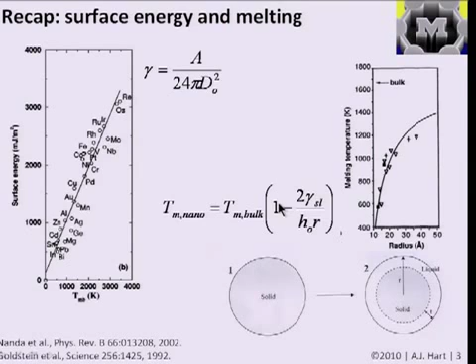And what I want to talk about today is how we can now build upon our understanding of wetting, or of surface energy, to understand a bit about how surface texture and surface energy relates to the wetting behavior, basically if liquids wet surfaces or they do not. And then we're going to talk about effects of micro nanoscale textures on fluid flows.

The idea here is that I think there are some analogies to what we previously defined as classical and quantum size effects, about how we need to think about fluid flows when the dimension of our system gets small. We're going to talk about what is considered the breakdown of the no-slip condition at solid surfaces when you have a small-scale system. Remember, if you took fluid mechanics in the past, when you derived the flow over a surface or the flow through a pipe, we always applied the no-slip boundary condition, i.e. we assume that the molecules at the wall have a 0 velocity.

That's not actually true, but when we model the flow through a macroscopic pipe, there is actually a bit of slip. But because interactions within the fluid, like molecules colliding with molecules within the fluid, are so much more important than interactions between the molecules and the wall, it doesn't matter whether we say there's slip or not. If we say there's no slip at that scale, it's a lot easier to solve the problem.

But it turns out, much analogous to thinking about boundary scattering of heat carriers and scattering of electrons going through materials, when we get down to small scales, these interactions with the wall become important, and it makes a big difference whether or not we consider whether the flow is slipping past the wall.

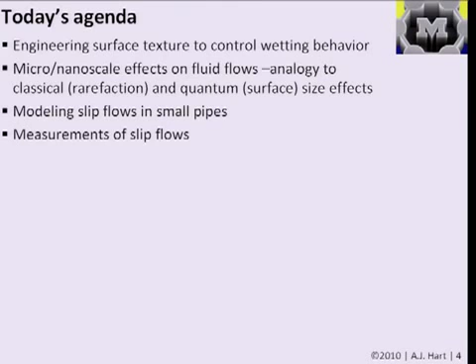In fact, some materials, for example carbon nanotubes, exhibit a lot more slip than other materials, and that leads to some interesting observations about their properties and understanding of slip. Although it's pretty difficult, we'll talk about research that has led to experimental understandings of slip flows of gases and liquids through microchannels and nanotubes, and that'll be our last topic.

So there are a bunch of papers to read. I pulled the Tuteja reading up from last time, so it's now in this lectures folder. Then I have two papers and one excerpt from a book talking about small-scale gas and liquid flows. Karniadakis, the excerpt I took from this book called Microflows, is a nice book on small-scale flows in general. The excerpt talks about the reasons why we need to consider different flow behavior in small-scale geometries.

And then the Arkilic paper talks about the way we model slip flows through microchannels, and discusses experiments used to measure things like the coefficient of slip, basically how much a gas molecule will slip against a wall inside a channel. Then the Eijkel paper talks a bit about liquid slip, and we'll understand the different ways we think about gaseous slip and liquid slip a bit later.

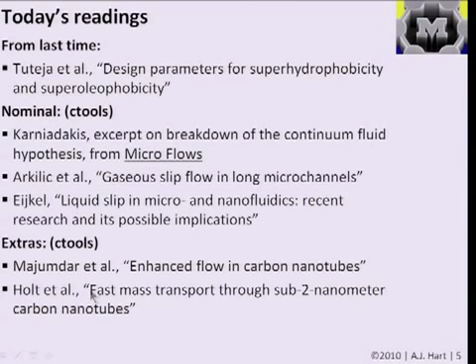There are a couple of extra readings that talk about slip flows and measurements and modeling of flows through carbon nanotubes. I think it's a really interesting topic, and we'll cover a bit about this in lecture. In the homework set, I ask you to reference this paper to obtain a number you'll use in your calculation. This is the paper I mean in the description to the problem, I think it's problem 1 in problem set 2.

Okay, so first I'm going to talk a bit about wetting, and you've probably seen wetting before in fluid mechanics or other classes. The new concept I want to introduce is that the ability to engineer surfaces chemically and physically is leading to understanding of how natural surfaces behave and how to design surfaces so they, for example, will attract liquids or repel liquids.

When I say attract, I mean having a surface that wets a liquid, or a surface that is wetted by a liquid like so, which is quantitatively referred to as having a small contact angle, because classically the contact angle theta is measured through the fluid from the substrate up to the edge of the meniscus here, or to engineer surfaces so the liquids don't like them, or they don't like the liquids.

And that is the case where you have a large contact angle, and there's a large angle if you measure through the fluid like so.

So wetting, in terms of a formal definition, is the ability of a liquid to maintain contact with a solid surface. And as you can imagine, what governs wetting behavior? Well, it's got to be the interactions between the molecules in the liquid and the molecules in the solid.

Imagine if you have a drop of liquid, which you can consider like a particle or a spherical body. There are cohesive interactions within the liquid, and then there are adhesive interactions between the liquid and the other material. So in the case of a liquid and solid, the contact angle between the liquid and the solid is going to be determined by this overall free energy balance, depending on what creates a net decrease in energy of the system.

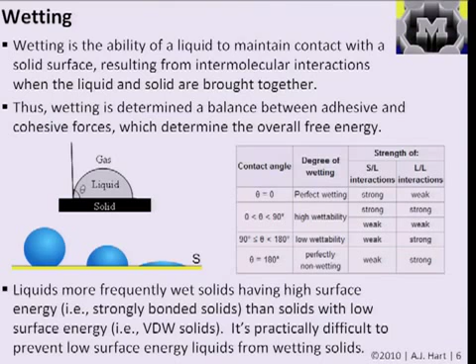If there's not a lot of attraction between the liquid and the solid, it's more likely to roll off. In terms of what governs surface energy, solids that are strongly bonded have high surface energies, and you'd expect them to have large van der Waals forces with other solids. Solids that are weakly bonded probably have lower surface energies and lesser van der Waals interactions, and that relates to wetting behavior in general.

One of the real practical challenges has been that it's hard to design surfaces that are non-wetting to liquids with low surface energy, because such liquids will be much happier to spread out and cover a surface, possibly decreasing the overall free energy of the system. This has practical implications for things like cleaning up oil spills, since oils and solvents have low surface energy, and it's also important for separation of liquids with different surface energies.

So I just wanted to show you a couple of videos. One of the things that's done when people study interfaces between solids and liquids is measuring the contact angle, and you sometimes use what's called a contact angle goniometer, which has your surface, a good light source, and a good camera that lets you get a picture of the situation.

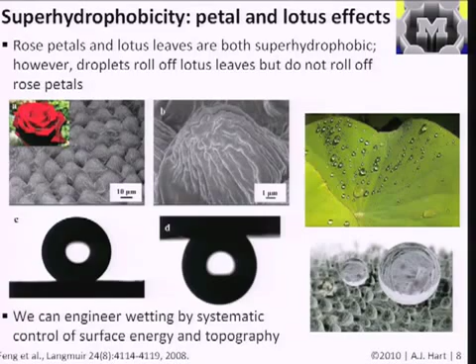When people look at the geometric dependence of how wetting depends on geometry, they typically define two different states when you have a textured surface. First, the simplest case is if you have a flat surface between a solid and a liquid and then a surrounding medium, which we'll for now say is a gas, and you define the contact angle like so. However, if you have a textured surface, and this can be something regularly textured, like something etched with micropillars, or something less regularly textured, like the natural surfaces we just saw, you have to consider the properties of this composite interface.

Basically how the liquid interacts with all the surface structures that you have. There are two states, and the state where the liquid is penetrating down to the subsurface, basically wetting all of the surface area available, is what's called the Wenzel state.

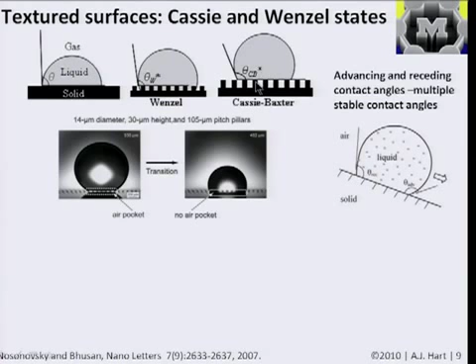And when the liquid is sitting up above the texture, it's what's called the Cassie or Cassie-Baxter state. You can go in and look up ways to derive the contact angles in both of these cases depending on the roughness and surface energy. But basically what happens is if you manipulate this texture in response to the surface energies of the materials the surfaces are made of, you can control the contact angle between the two.

There are ways also, for example, to observe the migration and wetting of surfaces at relatively small scales. This is a picture of a study of the wetting behavior of a surface inside an environmental SEM, where they're condensing water droplets on the surface while watching it happen. So this is happening at low pressure, and you're just letting a little bit of water vapor into the chamber, and the droplets are condensing.

For example, you can see here how some droplets nucleate on the bottom surface and are really too small to cover a number of pillars, and other droplets may nucleate on the top surface and then grow into larger droplets and perhaps will eventually end up covering the whole and being non-wetting on the top. We really haven't talked yet about why changing this texture makes such a difference to the liquid. That's going to depend on the particular conditions of the system.

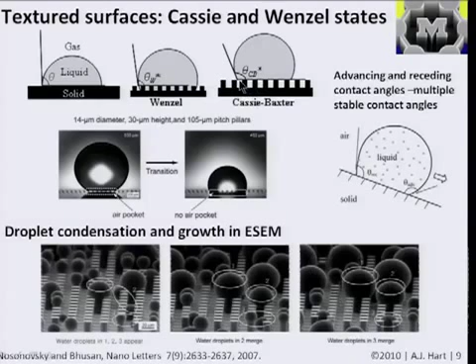What's been found in the case of the two flowers we saw before is that what governs whether or not a droplet rolls off the rose petal or stays on it, versus rolls off the lotus leaf, is how the surface of the liquid actually conforms or doesn't conform to the structures themselves. The texture of the surface in the case of the rose petal gives an overall non-wetting shape to the droplet, but at the interface, the droplet wets the surface very closely.

In the case of the lotus leaf, it's also a non-wetting behavior for the droplet, but the liquid stays above the pillars, giving low adhesion of the liquid to the surface, so the droplet runs off more easily. Whereas here, on the rose petal, you could say it's more stuck, and depending on the size of the droplet, if it's small enough, it can resist the force of gravity as you tip the leaf over.

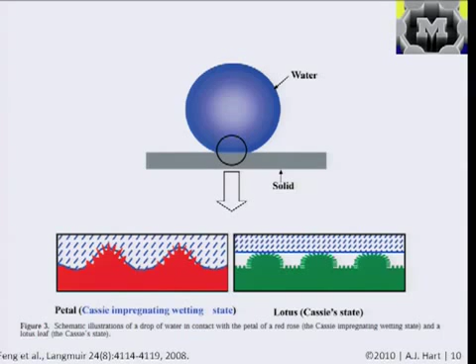There are ways to control the texture of surfaces and their coating. This is an example where a vertical film of carbon nanotubes was grown and then coated by CVD, a vapor deposition process, with a thin layer of Teflon, which has a very low surface energy. They were able to get an extremely hydrophobic surface, taking advantage of the small overall surface area of the tips. You can imagine you'd need to deform the liquid interface a lot for the liquid to penetrate this forest, which is energetically very expensive. So it's favorable for the liquid to stay up on top, and the low surface energy of the Teflon relative to water promotes the surface repelling the droplet, resulting in a surface that is extremely hydrophobic.

This was interesting because it combined the effect of texture and the effect of the chemistry of the coating, the low surface energy of the molecule itself, and at that time it was one of the most hydrophobic synthetic surfaces observed. Typically people say something is hydrophobic when the contact angle is greater than 90, but in this case it was essentially spherical, almost a perfectly non-wetting surface.

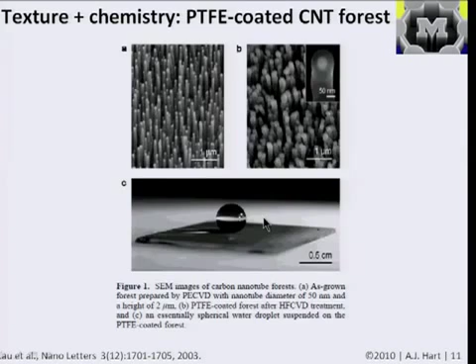More recently, there has been a lot more work in trying to understand how to texture surfaces at the micro-nano scale and quantitatively relate, for example, the shape of the features you create to how the liquid behaves both at the interface and overall.

In the Tuteja paper, it's discussed how these surface textures can be engineered geometrically and chemically to repel oils, liquids with very low surface energies. It turns out what makes a difference is having a texture called a re-entrant texture, something that basically can't be described by a function that would produce a hill shape. It cuts in over itself, meaning it re-enters as you go down.

There is a difference between what we would measure as the contact angle when we look at the droplet on the surface, and the real contact angle between the liquid and the surface. If you looked closely at this surface, you'd find the contact angle between the liquid and each structure is actually quite low, so it's locally wetting the surface. But if you look at the contact angle with reference to the top surface, it's much larger, and therefore you'd call it a non-wetting case.

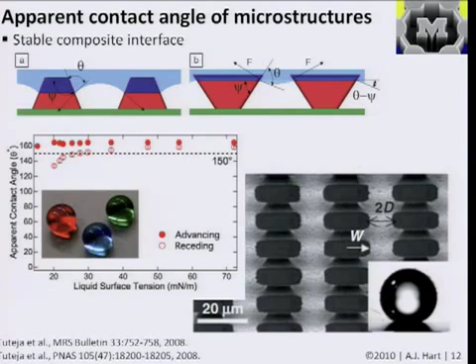Okay, are there any questions about that?

So for the rest of today, I'm going to talk about fluid flows at the small scale, or how we might have to think a bit differently about gas and liquid flows when we have confinement in the geometry. We're going to talk a lot about the basic example of having a pipe, and we're going to go from thinking about pipe flow at a large scale to pipe flow at a very small scale.

As I said before, a real guiding principle for us is that as the length scale of our pipe, meaning the diameter, the direction perpendicular to the flow, decreases, the molecular interactions with the wall become more frequent compared to molecular interactions within the bulk. If I'm a gas molecule going through the fluid, I'm more likely to collide with the wall than with a molecule in the middle as the diameter goes down, so these collisions with the walls become more frequent.

Also, as we remember from fluid mechanics for pipe flow, the amount of friction through the pipe increases, so it takes more pressure. There's more pressure drop from the input and the output of a pipe of fixed length as the diameter decreases, if you want to put the same amount of flow through it. And that is because the importance of the surface grows.

Another thing that's important to consider is that if you have high pressure drops over short lengths, in microscale geometries, and this applies to gas flows, the compressibility is important. Basically, you have to consider the density change as the flow goes through, and we'll see that has a big effect on the prediction we would have for, say, the flow rate through a pipe of a certain geometry.

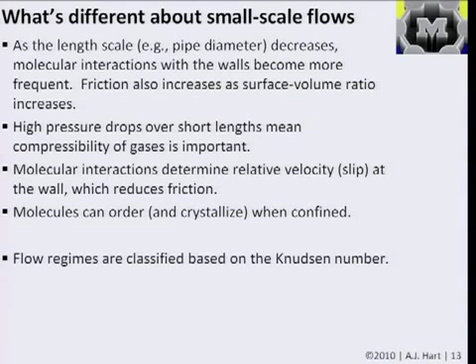We're going to classify flow regimes based on what we'll call the Knudsen number, and that relates to a mean free path for gas, just as we saw a mean free path for electrons or phonons.

So we classify flow regimes based on this dimensionless number called the Knudsen number, and the Knudsen number is equal to lambda, which is the mean free path, divided by L naught, which is our characteristic length scale. So in the case of a pipe of diameter d, our Knudsen number is just lambda divided by the pipe diameter.

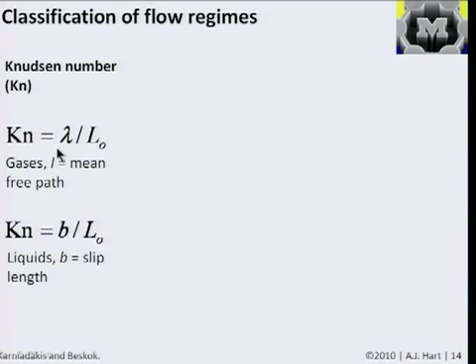In the case of liquids, gases and liquids are different because the density of a gas is way less than the density of a liquid. So for gases, we define the Knudsen number based on the mean free path, but for liquids, we define it based on a slip length which we'll call b. We'll show what the slip length actually means in a few slides. For gases, we can relate the mean free path to the ideal gas law and properties of the gas based on the kinetic theory of gases.

What this means is if you have a higher pressure, then you're compressing the gas and you're going to have a higher number density than normal, and that means the mean free path of the gas is going to be lower. If the mean free path is lower relative to the length scale, then you're less likely to be in a regime where these nanoscale effects are important.

As a calibration, we're going to use the value of a Knudsen number of about 0.01 as a boundary between what we'll call the continuum flow regime, where we can use the classical Navier-Stokes equations to describe the flow, and what we'll call a slip flow regime, where we're able to modify the Navier-Stokes equations for a pipe to account for this slip.

If you go down in scale or down in density, having a more rarefied gas such that the Knudsen number goes up, then you go into regimes where you really need to model the flow at a molecular level and consider the true interactions and attractions between molecules. But in our case, we'll operate mostly in this slip flow regime, and talk about how we can capture this phenomenon of slip quantitatively, then use that to understand its effect on things like the pressure gradient through a pipe, the flow rate, and so on.

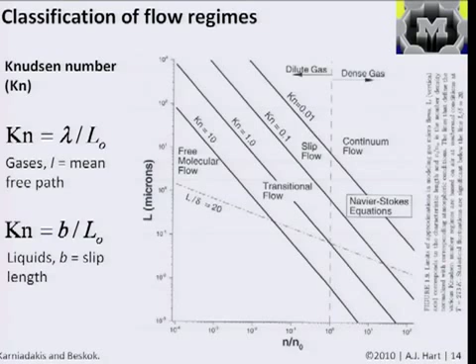Our ability to think about the origin of slip and how that relates to the properties of the gas can come from this basic model of particles or molecules in a box that we've seen before. For now, we're going to consider that our gas is an ideal gas, and we'll spend a minute talking about how we can define the mean free path for a gas, or how we would get a value for the mean free path depending on the properties of the gas and the conditions of the flow, like the pressure and the temperature.

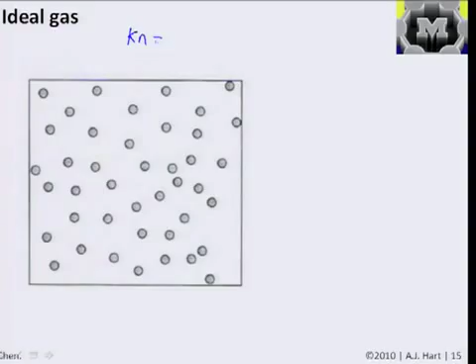So we saw on the previous slide that we're defining our Knudsen number for gases as the mean free path divided by our length scale, or lambda divided by D.

According to the ideal gas law, which has many forms, the one we're going to use now is that the gas pressure is equal to N, which is our number density that we defined previously, times Boltzmann constant Kb, times the absolute temperature. In this case, we can say that Boltzmann's constant is 1.38 times 10 to the minus 23 joules per Kelvin.

A typical value for the number density is, say, about 2.7 times 10 to the 25 molecules per cubic meter. So if we assume that we have a cubic meter of molecules, and we stop time and look at the positions of all the molecules and calculate the average spacing between the molecules, then we can say that we have a mean molecular spacing, which we're going to call delta, which is approximately equal to 1 over the cube root of the number density, which we'll say is approximately 3 times 10 to the minus 9 meters, or 3 nanometers.

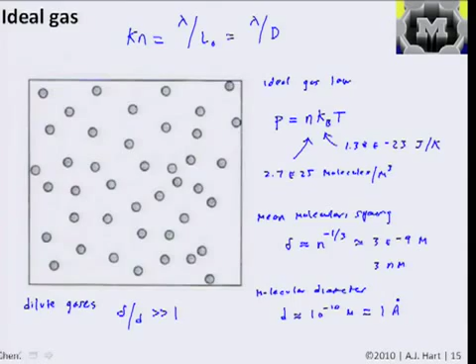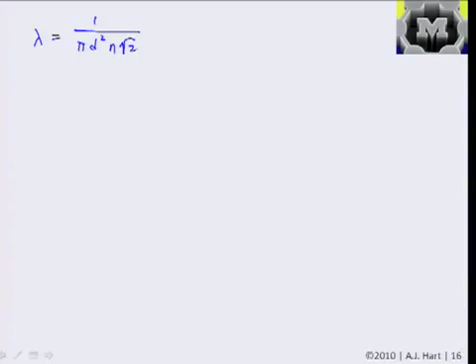So now with this assumption, we can look at the formal definition of the mean free path. From the theory that describes gas behavior in this way, it's stated that the mean free path lambda for a gas is equal to 1 divided by pi times d squared times n times the root of 2. And as we know, this is our number density, which is a function of pressure, as defined in the ideal gas law on the previous slide. And this was our so-called hard sphere diameter, our molecular diameter.

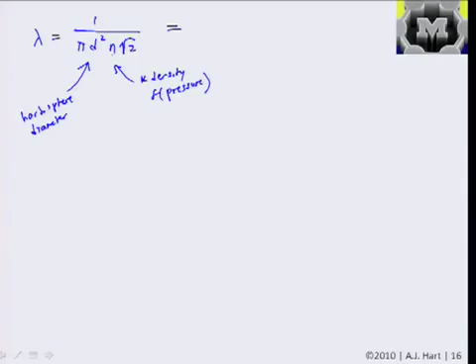And if we substitute the ideal gas law in here, just substituting n from P equals n times Boltzmann's constant and temperature, we get this is equal to Boltzmann's constant times temperature divided by pi times the pressure times the hard sphere diameter squared times the root of 2. So given these, if we knew the pressure, the temperature, Boltzmann's constant is always the same, and knew our hard sphere diameter, this would let us calculate for this dilute gas, which is good for the gases we're going to consider, the mean free path under conditions. And as we would expect, with temperature at the same pressure, the gas is going to expand.

So if the gas expands, the mean free path gets bigger. If the pressure goes up, then the gas is compressed, and the mean free path goes down, so the molecules travel a bit less before they collide with another one.

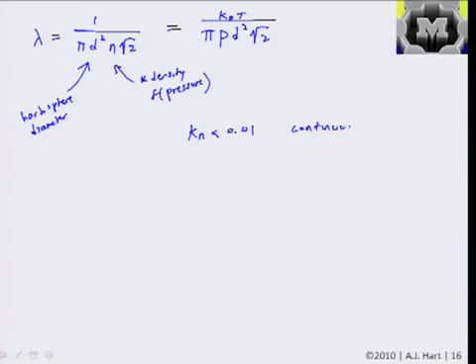Remember, we defined on our chart before that if the Knudsen number is less than 0.01, we say we're in the regime of continuum or no-slip flow. If the Knudsen number is less than 0.1 and greater than 0.01, then we're in the slip flow regime. And if the Knudsen number is greater than 0.1 and less than 10, then we're in what's called the transition regime. There aren't really a lot of clear theories of how to treat the transition flow regime, other than it's somewhere between this case where you just have to think about slip at the wall to a case where you're beyond a Knudsen number of 10 and the definitions of macroscopic properties break down.

Just as we saw for transport, like defining resistivity of a material, you need to have enough size, enough collisions, enough scattering. The same thing occurs with, for example, defining the viscosity of a gas. If you don't have so many molecules and these interactions are so important, it's hard to assign a continuum property.

So if we were to calculate lambda, say for air, and we said, what's the mean free path of air at 1 atmosphere at 300 K, so pretty much air inside this room, then we would get that lambda is about 65 nanometers. So to get a Knudsen number less than 0.01, we're definitely in the microscale regime.

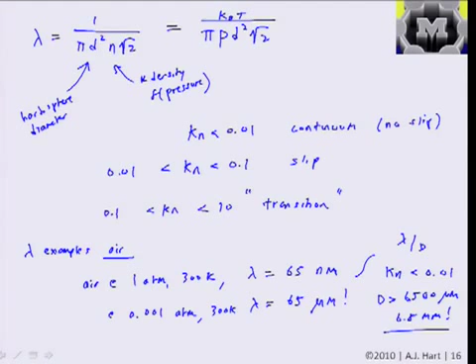And as you can imagine, in any practical vacuum for materials processing, you're in the free molecular flow regime pretty easily because those vacuums are pretty low.

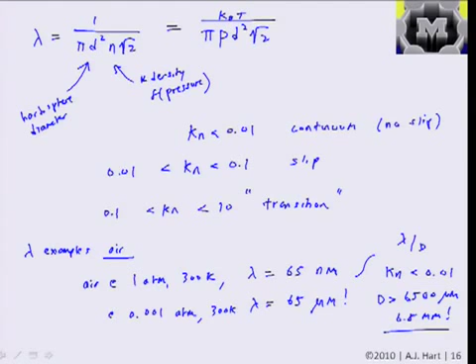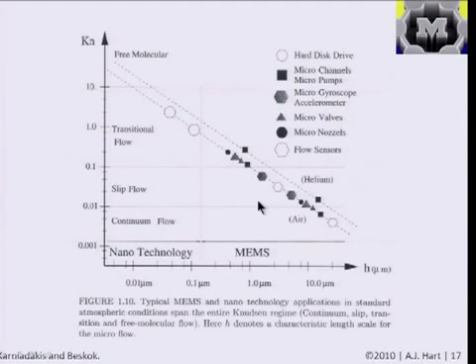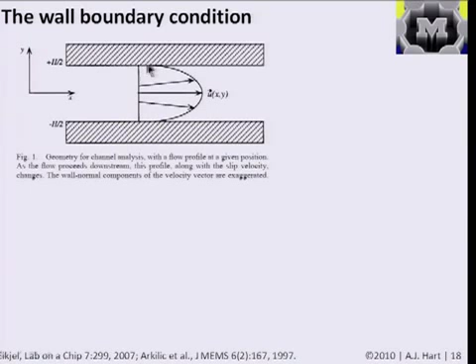So how we're going to think about slip in a quantitative fashion is we're going to look at the boundary condition between the fluid in a channel and the wall. We are going to consider how our modeling may be a bit different if we now say that it's not the case of no slip, but there's some slip between the molecules and the wall, or some relative velocity. In the case when we previously solved the pipe flow equation in fluid mechanics, we said that the shear stress is equal to the velocity gradient at the wall, and that the velocity at the wall is equal to 0.

And that's the case over here. Now we're going to apply a velocity boundary condition at the wall that allows us to have some slip between the fluid and the wall. We're going to apply a slip coefficient, which in this case is called B, and in our derivation will be called S. That'll say that the velocity at the wall, in this case h over 2, and in our case for a circular pipe we'll say it's r, the radius of the pipe, is equal to this slip length B, or the slip coefficient S, multiplied by the velocity gradient.

In the case of partial slip, the physical interpretation of this slip length B is the depth into the wall you would have to go in order to reach a zero velocity if you extended this velocity gradient into the surface. An absolutely limiting case, which doesn't really happen but sometimes approximates reality, is perfect slip, where B would be equal to infinity, and the velocity profile would just be straight, because there would be nothing retarding the motion of the fluid at the wall.

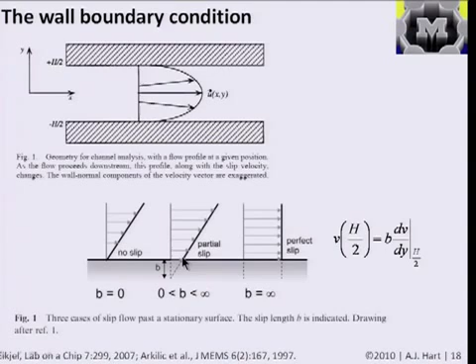It's a lot easier to think of a liquid moving smoothly past the wall than a gas, where there are a lot more collisions and more space between the molecules. But this treatment will apply to both cases and let us predict the flow rate in both. Okay, so let's start and work this out for the simple case of a pipe flow.

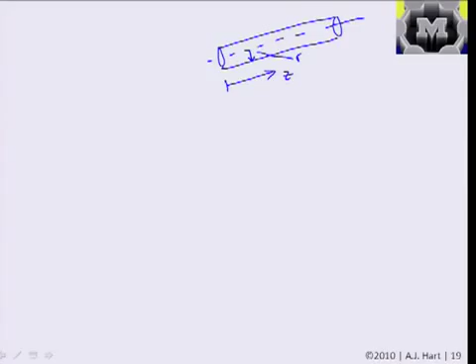So we're going to consider a cylindrical pipe, and we're going to say that the flow down the pipe is happening in the z direction. The pipe has a central axis, and the distance from the central axis is the coordinate r. The pipe has a radius r, and like we said before, the diameter will be d. We're going to assume the case of steady, fully developed flow.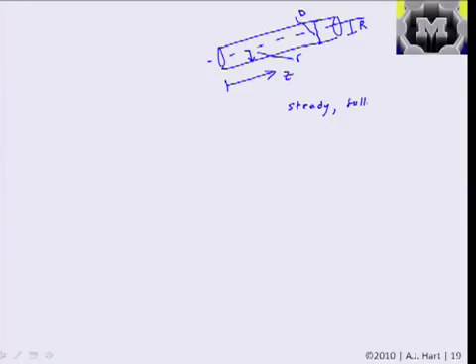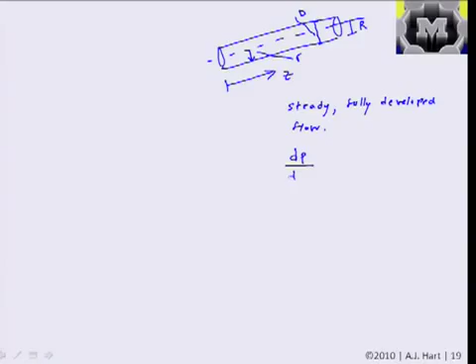Which means, importantly for us, that the pressure gradient, dP/dz, is constant. So we're not considering any transients or changes in conditions here. And we'll have this nice parabolic, azimuthally symmetric in the theta direction, velocity distribution. We're basically going to solve what this is depending on how much slip we have at the wall.

So we can state the Navier-Stokes equations for this case. The Navier-Stokes equation is kind of like the Schrodinger equation, defined for a very complex case to consider variations in density and pressure and velocity in space and time. It's difficult, if not impossible, to solve those exactly, except for very specialized cases.

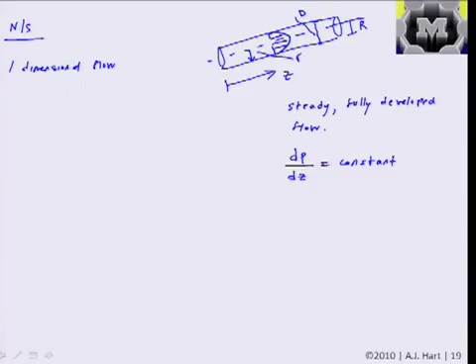But in the case of this flow, which is one-dimensional, meaning we have V varying in the r direction only, or the profile is self-similar with r and therefore symmetric in theta, we only have variable terms in the r direction. So our reduced Navier-Stokes equation for this case says that 1 over the viscosity times the pressure gradient, dP/dz, is equal to 1 over r times d by dr of r dv/dr.

And so now we're going to integrate this equation. We just have one variable because dP/dz is constant as we defined before. We can apply a boundary condition and solve for the velocity profile. So if we pop the r on the right side up to the left side, we have r over mu dP/dz equals d by dr of r dv/dr.

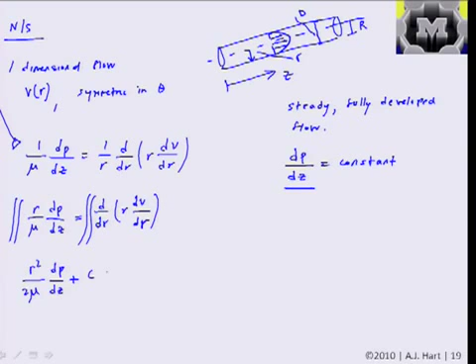And because we have two derivatives in r, we need to integrate twice. So we can just integrate both sides twice, and because they're indefinite integrals, we're going to add constants. The first time we get r squared divided by 2 mu times the pressure gradient, and we can add an arbitrary constant to one side, which will account for both sides. The integral of the first derivative is just the first derivative, which is equal to the integral of r dv/dr.

And we can take the r from the right side and divide it out on the left side. So now we can just take the integral of r divided by 2 mu dP dz plus our constant divided by r equal to the integral of dV dr.

And if we integrate this once more, we'll get r squared divided by 4 mu plus our constant times the natural log of r, because the integral of 1 over r is the natural log of r, plus another constant d, is equal to v, v of r. I just had v in the previous lines to save notation. So this says that our velocity profile as a function of r is this parabola, a function of r squared, plus c natural log of r plus d.

Right away, we know that we need the velocity at the center of the pipe to be finite. And the natural log of 0 diverges, so by that we can immediately say that our constant c needs to be 0. So we can lose the term that's a function of c.

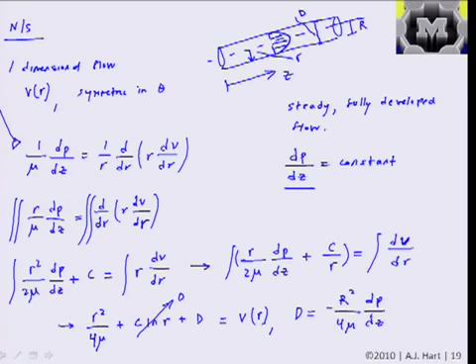So our final answer for the no-slip case, I'm going to call this V sub n, i—n for no slip, i for incompressible—as a function of r, is equal to minus 1 over 4 mu times the pressure gradient times the quantity R squared minus r squared. So velocity is maximum at the center when little r is equal to 0, and velocity is 0 at the wall when little r equals big R.

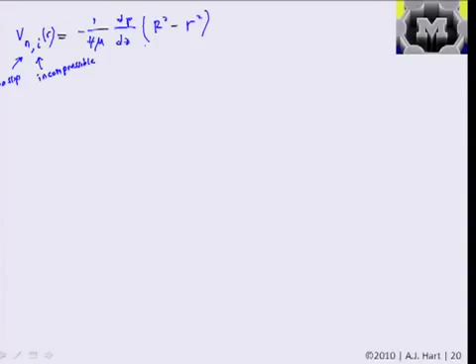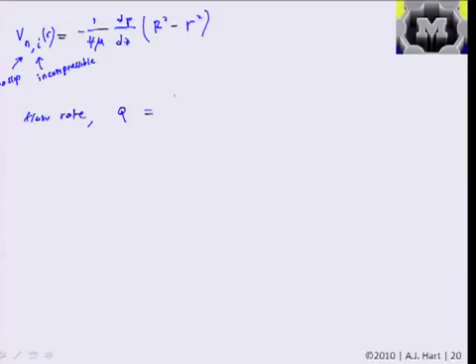And if we want to define the flow rate, we can give it the symbol Q, which is typically used for flow rate. The flow rate is just the integral of the velocity over the area. So we take the integral over the area of V of r times our differential area dA, and the dA of a circle is just 2 pi r dr, because we can integrate the thetas right away. So this is equal to 2 pi times the integral from 0 to R of our velocity distribution in the r direction times r times V of r dr.

We're not going to go through the math to save time, but if we substituted our velocity distribution in here and did the integration, this would tell us that the flow rate is equal to minus dp dz times the quantity pi R to the fourth divided by 8 mu. The pressure gradient is negative because pressure drops as the flow goes down, so we have a positive flow rate. As the pressure gradient gets bigger, we can drive more flow through the pipe. As the radius gets bigger, we can drive more flow through, to the power of 4.

So that's really indicative that the flow resistance, or the amount of flow we can pipe through, is strongly dependent on the radius. And as the radius gets smaller, with a very strong dependence, you require more force to counteract the friction at the wall.

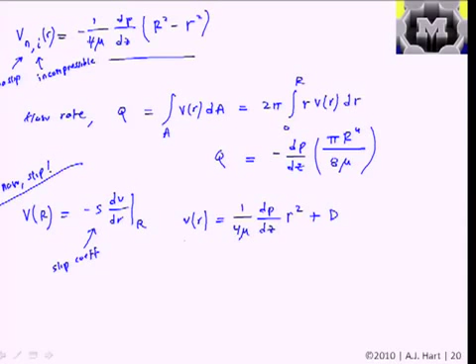And so now, if we take the first derivative, or if we evaluate it, we take dv dr, then we have this as being equal to 1 over 2 mu dp dz, and the d goes away.

And so now we can say that v of r is equal to minus s over 2 mu times dp dz, which should equal the substitution of r here, or 1 over 4 mu dp dz times r squared plus d. And there should be an r here and an r there.

Sorry, was that clear?

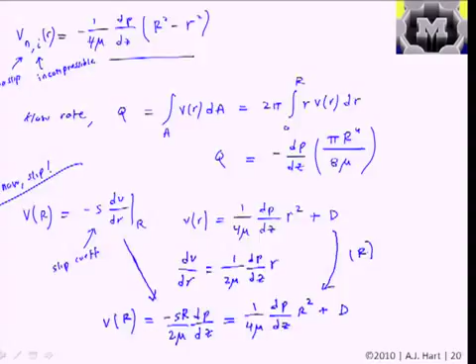So now, if we solve this for D, just rearranging the previous equation, we get the answer of minus 1 over mu times the pressure gradient times the quantity r squared over 4 plus SR divided by 2. I'll write the S a bit more clearly.

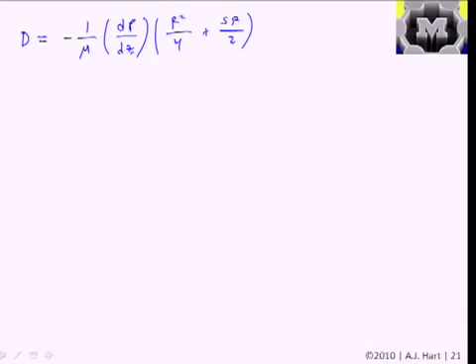And then if we substitute this in our original equation and collect the terms, we get that the velocity for slip flow, in the case of still incompressible flow, is minus 1 over 4 mu times the pressure gradient times r squared minus little r squared plus 2 SR. The slip coefficient, like the slip length, has units of length, and we can see that all that's effectively been done is we've added another term that corresponds to the contribution due to slip. So if our slip length or slip coefficient is 0, this term goes away and we have the same equation as when we did no slip.

It means this is effectively, quote, adding extra velocity to the whole profile. So slip has the effect that at the same pressure gradient, you're going to be able to push more flow through the pipe. It's like taking all the fluid in the pipe and adding a constant velocity to all the streamlines, and that's just quantified by this term here.

And so we can go through the same exercise we did to calculate the flow rate. If we determine the flow rate, Q, as the integral over the area of V of R dA -- I won't go through the procedure, but it's all in the written notes I've posted -- we get the answer that the flow rate for the slip incompressible case is minus pi dP dz times r to the 4th divided by 8 mu, what we had before, plus SR cubed divided by 2 mu.

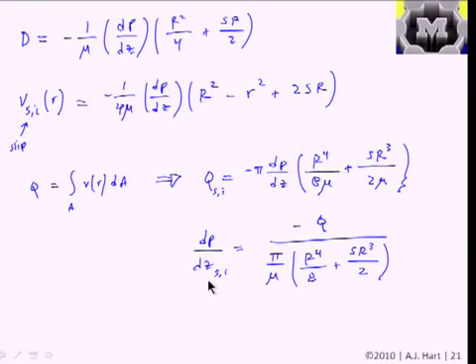Okay, so I have a bunch of extra blank slides here. So practically, let's see how much of a difference this makes, because we haven't really said how much S affects it. You can see that if S, the slip length, is on the order of the size of the pipe, then it will be just like having R in there, or D over 2, and it would make a big difference.

So these are some calculations I did a while ago for flow of methane at high temperature through a microchannel. This is a 5 micron diameter pipe at pretty high temperature, and the gas is methane, so it's a bit different than air, but I think the mean free path in this case is about 250 nanometers. So the mean free path of methane is about like air at room temperature, and this is about 4 times room temperature, so the mean free path is like 4 times 65 nanometers, so about a quarter micron.

What I'm plotting here is, in the case of a constant flow rate of 1000th of a cubic centimeter per minute through this little pipe, the velocity as a function of radial position from the center to the outside.

So here I'm posing the same flow rate Q, so the integral under the curve is going to be the same. But you can see that in the case of slip, the velocity at the wall is about 20% of the maximum velocity in the center, and it effectively changes the resultant shape of the flow profile. The different curves here represent the case of slip flow and the case of no slip flow.

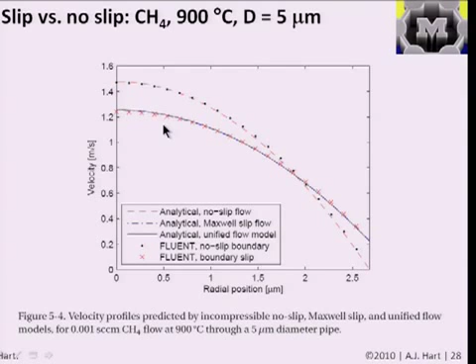There's also another model here called the unified flow model, which I was looking at that we won't get into, but that's one that's proposed in the Microflows book if you were to go on. It just tries to consider different parameters and let the applicability of this approach go to higher Knudsen numbers, so to what they call the transition regime. But we don't really need to consider that for our understanding here.

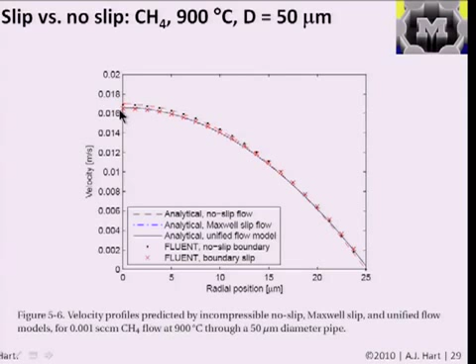Now here's a case where I have the same conditions and the same flow rate, 0.001 SCCM, but I've increased the diameter of the pipe tenfold. Now I've gotten into a regime where the slip really isn't important, so the velocity profiles are almost identical in all the cases. There's a difference of only a few percent, so this is a case where applying the no slip condition would have been almost entirely appropriate.

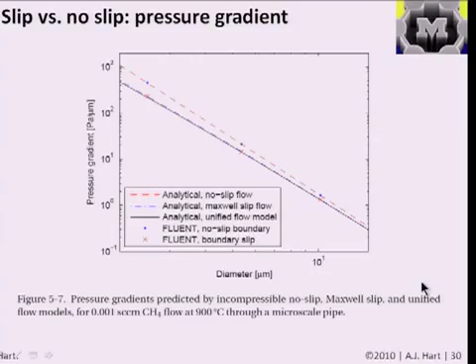This is just a plot of the equations for pressure drop that we had derived on the previous slides, except I defined S, the slip coefficient, based on what I'm going to talk about now, based on the relationship between the mean free path of the gas and how it interacts with the wall. That's how we apply the case of the gas to these equations, just having the known value of S and plotting those equations as a function of the geometry.

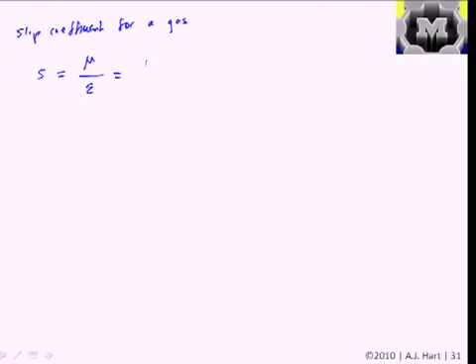So the formal definition of the slip coefficient for a gas, remember we called it S, is the ratio mu over epsilon, which is said as the ratio of the internal friction in the gas to the wall friction.

So the viscosity of the gas is the gas's resistance to deformation by shear, so it's like the internal friction of the gas. And this parameter epsilon is a parameter that we're going to call the wall friction, or how much friction the gas feels when it interacts with the wall, because that's kind of what slip is. If there's a lot of friction between the gas and the wall, then it's not going to move very fast when it hits the wall. But if there's less friction, then it's going to move freely past, and there's going to be a lot of slip.

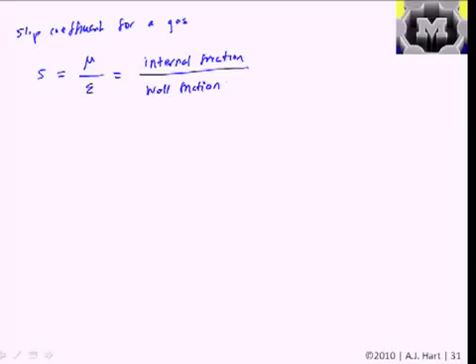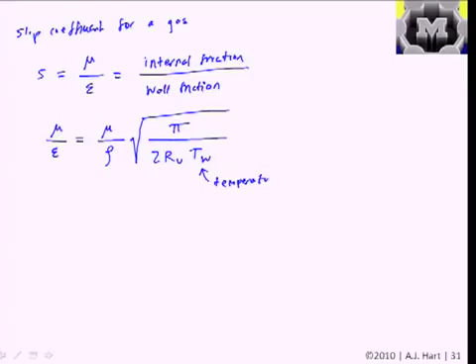Without going into the details, I can just tell you that this ratio, mu divided by epsilon, is defined as mu over the density of the gas, rho, times the quantity which is the square root of pi divided by 2 times the universal gas constant times the wall temperature, multiplied by the quantity 2 minus

a parameter sigma v divided by sigma v. And sigma v is what's called the tangential momentum accommodation coefficient. Kind of a mouthful.

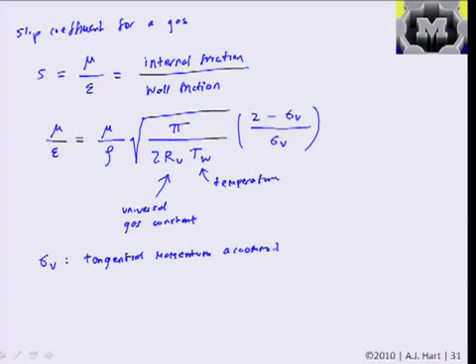We can write it out as the difference between the incoming tangential momentum of the gas molecule minus the outgoing or reflected tangential momentum, divided by the incoming momentum.

Let's think about that physically in a couple of limiting cases. One where the gas molecule comes in at some incident angle and hits the wall and basically reflects perfectly—this is like specular reflection of the gas molecule. So this is the case where the reflection is specular and the tangential momentum accommodation coefficient is 0. This is where we would have the most slip.

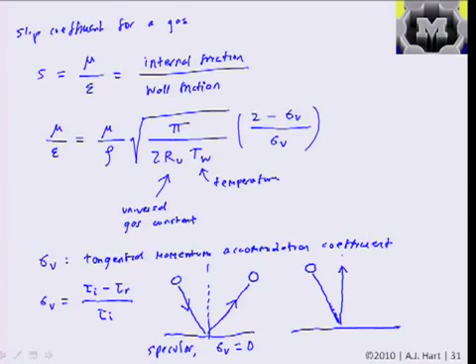In the other limiting case, if the molecule comes in and loses all its tangential momentum, or all its lateral momentum, and goes straight off—so it's like going from an angle bounce to a vertical bounce, totally stopped in the streamwise direction—then this is what we'll call diffuse, and this is the case where sigma v is 1.

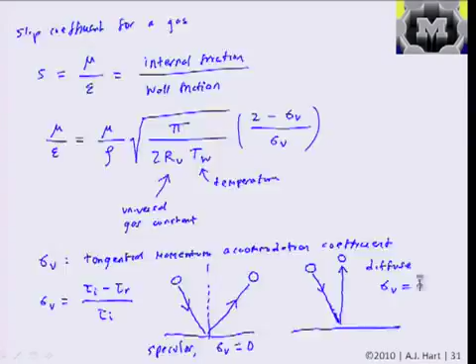It turns out that for most gases, our momentum coefficient sigma is between 0.75 and 0.85, and this is talked about in a bit of detail in one of the papers. They actually describe, as we'll see in a minute, how they characterize the slip flow through microchannels and make such high precision measurements that they're able to calculate what this actually is. You can look into sources and look this up for various gases, but if you're doing this kind of calculation, a value of about 0.8 is pretty accurate.

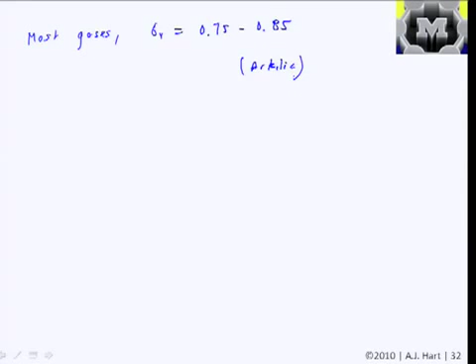Another thing that's important to consider is that as geometries get small, we have this great amplification of pressure drop. So to force the same flow—remember it's like 1 over r to the 4th for our dp/dz—you can get relatively high pressure drops when putting flows through small pipes. Compressibility, of course, is only important for gases and not for liquids.

So we could go through additional exercises that would let us derive the equations for compressible flow through these channels, both compressible no-slip flow and compressible slip flow. We won't go through it, but basically, when we derive the volume flow rate, we were conserving volume flow and weren't worried about density. In the case of compressible flow, volume flow is not conserved—the volume going in can be different than the volume going out—but of course mass flow is conserved. So you apply conservation of mass instead of conservation of volume, and you have a density gradient through the pipe, and that, with some more involved math, lets you solve for compressible flow in the channels.

You can see that in the Arkilic paper if you want, and I have a bit in my notes about it. Anyway, what I did here is I took the same geometry of having a 5-micron diameter circular pipe with methane at 900 C—incidentally I was looking at this for growing nanotubes in microchannels, so this is a type of condition you might use to grow carbon nanotubes, as we'll see later.

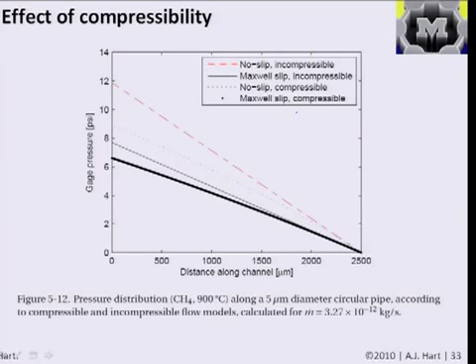For note here, we're looking at PSIs of, say, 5 to 10, which is like maybe 1/3 to 2/3 of an atmosphere over a distance of a couple millimeters, say 2,000 microns. So if you have a microchannel that's a couple millimeters long and a few microns in diameter, you can have practically quite high pressure drops.

So just one more slide before we go, and then I'll pick up with the rest next time, which is mostly talking about examples from the literature, examples from the papers you've read. But to conclude, I think we should learn a bit about what the molecular origins of slip are.

Basically, what determines the velocity at which the fluid moves over the wall. We had this momentum accommodation, but basically what determines how much momentum is transferred. So we need to consider, as we did in the case of wetting, how the molecules in the fluid feel the molecules in the wall.

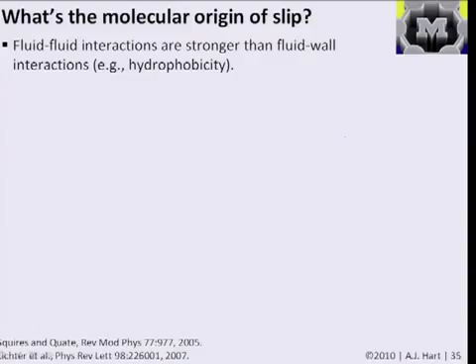In the limiting case where there's a lot of slip, that can mean that the interactions within the fluid are stronger than the interactions with the fluid on the wall. For example, if you have a surface that's hydrophobic and you're flowing water through it, you can have more slip because the water doesn't like the wall and the wall doesn't like the water in a general sense.

Another means of creating slip is that the roughness of the wall itself can trap gas molecules dissolved in the liquid, creating a kind of lubrication layer. There's actually a very small cushion of air at the interface between the fluid and the wall, and that can reduce the friction that the liquid feels as it moves through the channel, kind of analogous to having just a few contact points where the liquid only feels high friction at those points.

This is also practically important for things like designing surfaces for drag reduction for underwater vehicles and ships, and there's a big difference here in the behavior at low Reynolds number versus high Reynolds number. These kind of lubrication layers tend to break down when the flow velocities are higher.

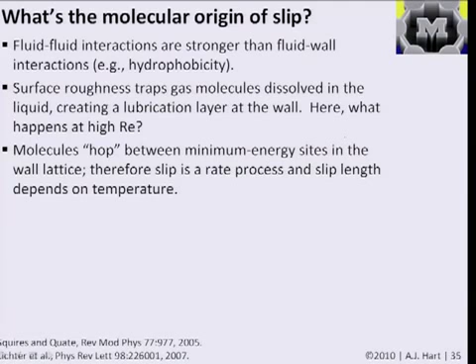We can also consider that the actual physical interaction between the fluid and the wall is like a diffusion process, or like hopping of molecules along the surface. Every time the molecule interacts with a certain site on the wall, there's some attraction and interaction—the fluid above is pushing it along, and the wall is pulling on the molecule. The slip length and this behavior can depend on temperature based on the overall transfer kinetics of the process.

We won't practically consider exactly what this case is, but I just want you to realize the origin of this behavior and how we can capture it using the simple parameter of the slip length. Those are the kind of things I'm asking about on the first problem of the problem set, with application to flow through nanotubes.

So we'll pick up with the rest of the examples on Monday, and we'll also talk about electrostatics in fluid flows.